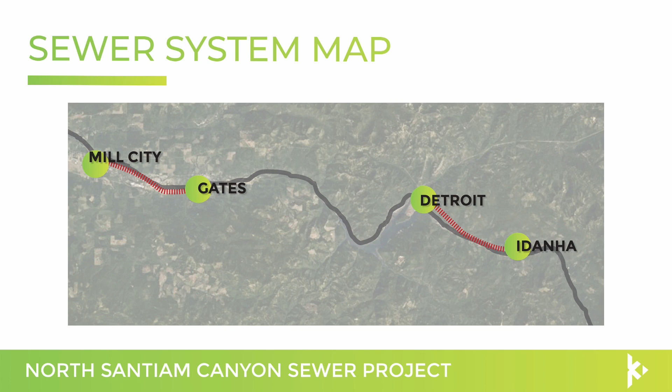This project is needed for a variety of reasons. The Mill City sewage treatment system and treatment plant currently have deficiencies in the capacity of sewage that can be treated and are at the end of their useful life. Funding is currently available to build these facilities through federal funding programs. These facilities will help support economic growth in these communities and also allow for the development of future housing, which cannot currently be accommodated by the existing treatment facilities.

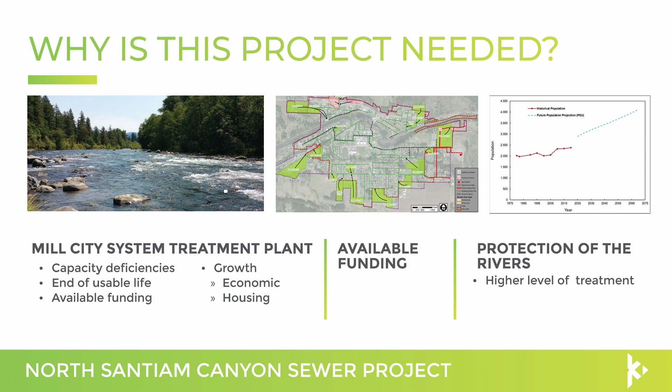The current planning efforts have been underway since 2017, and previous efforts began in 1996. This slide shows a timeline of both the previous and current efforts. The previous efforts began in 1996 with preparation of the Upper North Santiam River Canyon Sewage Treatment Feasibility Study. In 1999, the Gates Sanitary Survey was completed. In 2001, a Detroit Idanha wastewater facilities pre-design report was prepared. In 2002, the Detroit Idanha Value Engineering Study Conceptual Design Review was completed.

In 2003, a sanitary survey of on-site disposal systems for Detroit and Idanha was conducted. In 2008, the Idanha Wastewater Facilities Plan update was completed. In 2010, the Mill City Wastewater Operations and Maintenance Manual was prepared. And in 2015, the Detroit Wastewater Feasibility Study was completed. The current efforts began in 2017 with preparation of the North Santiam Canyon Regional Wastewater Analysis and Land Inventory Study. In 2020, the North Santiam Sewer Authority was formed. In 2021, the North Santiam Sewer Authority Wastewater Master Plan was prepared.

In December of 2023, the Mill City to Gates Wastewater Facilities Planning Study was submitted to DEQ. In December of 2024, all federal funds provided through the American Rescue Plan Act must be obligated. Those same funds must be spent by December 2026. In 2026 and beyond, there will be continued upper basin planning, design, and construction.

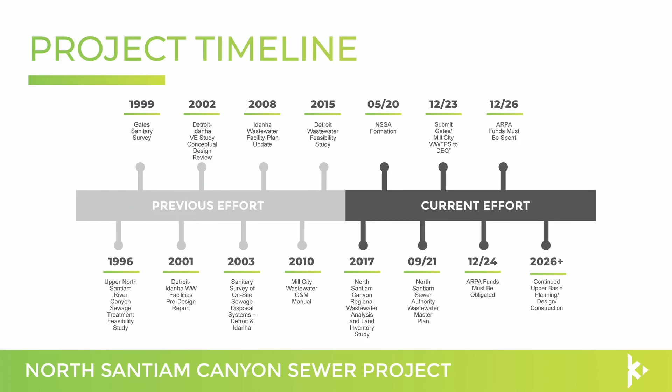Slayden has been selected as the general contractor and construction manager for this project. They are teamed with K&D Excavating. The current process began in 2023 and concludes in 2026. The flowchart on this slide depicts the schedule for that process. It shows engineering and design occurring in 2023 and 2024, with construction milestones occurring in 2023 and at the end of 2024. Pre-construction, including initial cost estimates, alternatives analysis, and review of constructability, as well as other steps, are occurring in late 2023, 2024, and early 2025.

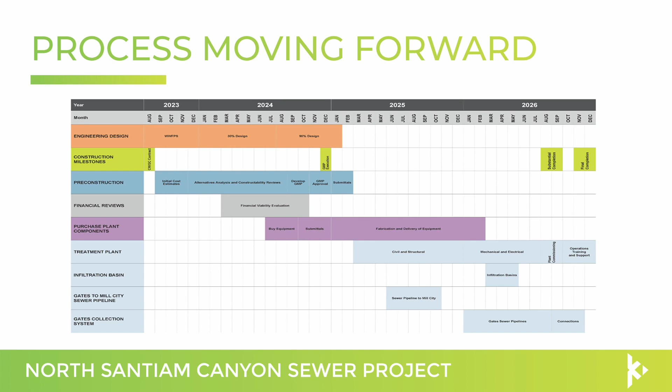A financial viability evaluation will be conducted between March and October of 2024. Plant components will be purchased between mid-2024 and the end of 2025. Treatment plant construction and design will occur during 2025 and 2026, including operations training and support in the latter part of 2026. Infiltration basin facilities are proposed to be constructed in March through June of 2026. The sewer pipeline from Gates to Mill City is scheduled for construction between June and October of 2025. Gates sewer pipelines and other connections are proposed to be constructed in 2026, starting in January and completing in November of that year.

This slide depicts the existing Mill City wastewater system. It was constructed in 1992. It has a number of issues. The collection system is characterized by small pipe diameters. The existing capacity is sufficient to treat existing homes and businesses in the area, but additional capacity for future growth is needed. In terms of treatment and disposal facilities, currently the maximum daily design flow is being exceeded on the highest flow days of the year. There would be a very high cost to address the treatment deficiencies due to the age of the plant, and it cannot be expanded under current year 2023 permitting rules.

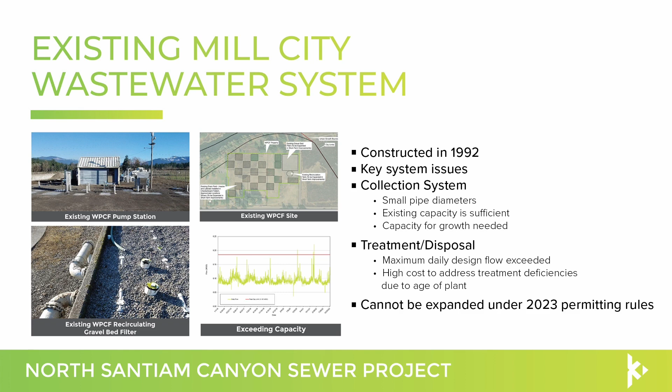This slide shows several images of the existing wastewater treatment system in Mill City, including the pump station, the recirculating gravel bed filter, the existing wastewater treatment site, and a graph that shows the number of days on which capacity has been exceeded in 2023.

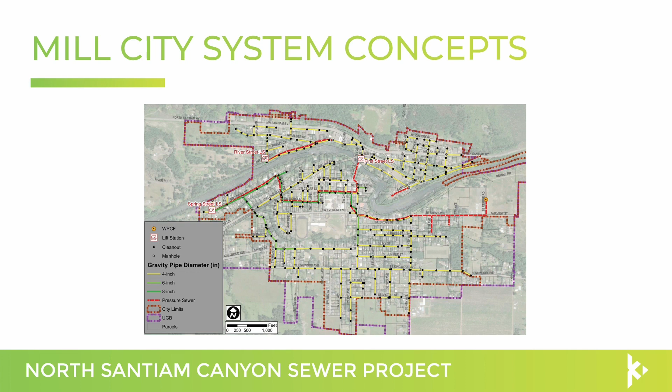This slide depicts the existing collection system in Mill City. It includes a combination of 4-inch, 6-inch, and 8-inch collection pipes, as well as pressure sewer lines, manholes, cleanouts, and a lift station.

Subsurface investigation was conducted in 2023. In phase 1, in March of 2023, pits and infiltration tests were completed at 4 sites to characterize shallow soils and how infiltration would be handled by those soils. In phase 2, in July 2023, a single monitoring well was constructed to conduct aquifer testing to characterize deep soils in 3 of the sites and how infiltration would occur in those soils.

In phase 3, in August and September of 2023, based on the results of phase 1 and 2 investigations, 2 additional monitoring wells were constructed and 2 temporary borings advanced at the most favorable site. The team then conducted aquifer testing and evaluated how infiltration would flow through the soils at that site. This slide depicts several photos and a diagram showing those activities and the results of the modeling work.

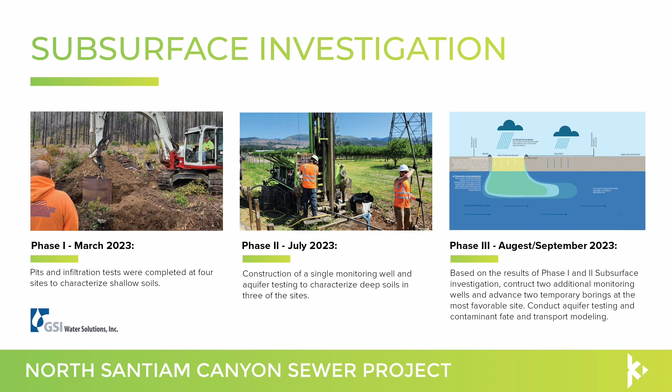2 different approaches are proposed for the collection systems in Mill City and Gates. In Mill City, existing collection system connections, including tanks for effluent, would be retained for existing homes and businesses. However, the treatment plant would allow for future users to directly connect to the new sewer system without tanks or pumps. In the community of Gates, existing septic tanks and drain fields would be removed or abandoned per state requirements.

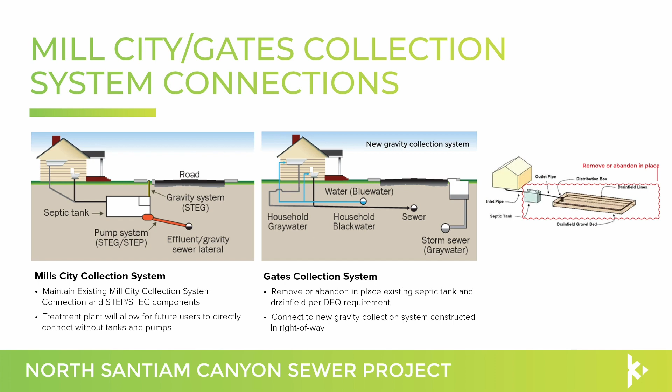Those homes and businesses would connect to the new gravity collection system, which would be constructed within the rights-of-way of roads in the area. On this slide, those different approaches are depicted with diagrams showing connections as well as existing and new facilities.

A concept for the new treatment and disposal facility has been developed. This slide depicts a diagram showing how that system would look. It indicates a series of infiltration basins as well as other buildings and facilities that would be provided at the location of the facility. The total developed acres equal about 6.25 acres, with the total site being just under 9 acres.

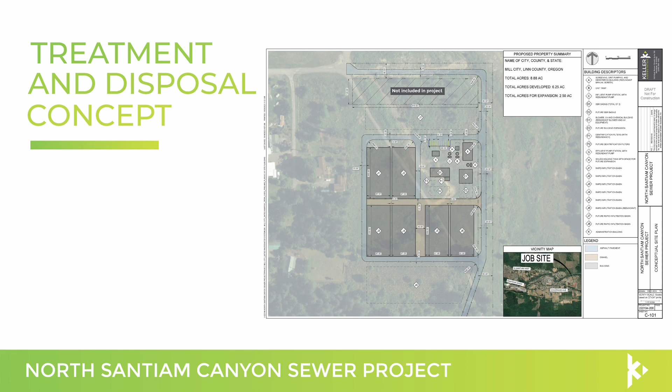Rapid infiltration basins would be used during the final step of the treatment process. These basins would be used to place highly treated and disinfected effluent into the ground. This slide depicts examples of these types of systems in the state of Florida, in Camp Rilea, Oregon, and in the state of Minnesota.

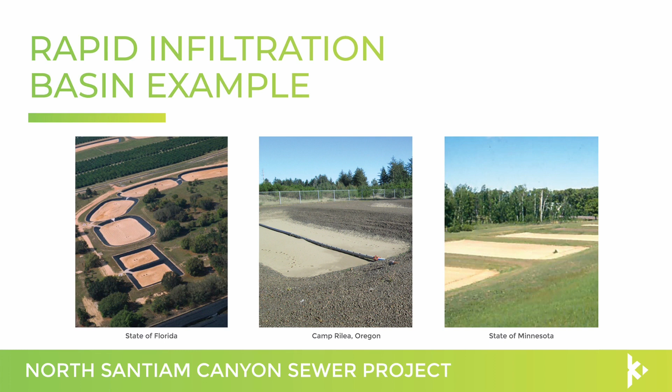The treatment process includes a variety of steps. This slide shows a diagram which illustrates those steps. First, the influent flows into a headworks facility where large particles are screened out and transported offsite. The effluent next flows through another facility where grit is screened out and also transported offsite. Next, the effluent flows into a set of equalization tanks, also called sequence batch reactor tanks.

2 things take place here. First, through a settling process, a sludge is removed from these tanks, sent to a dewatering tank, and then transported offsite. Second, equalization occurs as the secondary effluent is transported into the tertiary treatment facility, also called a denitrification filter.

The effluent is then sent through an ultraviolet disinfection facility before being discharged to the rapid infiltration basins. In this step, the highly treated and disinfected effluent is absorbed into the underlying soil beneath the rapid infiltration basins.

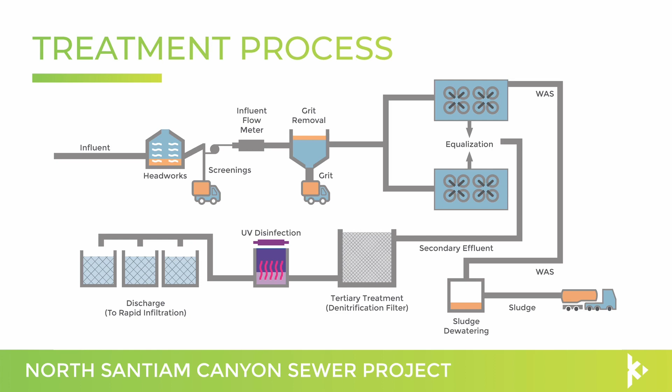The preliminary collection system in Gates includes a series of pipes constructed in the right-of-way. The map on this slide shows the general location of those pipes, which would be within the road right-of-ways. It also shows the locations of manholes and existing properties that would be served by the system, as well as the boundaries of the community.

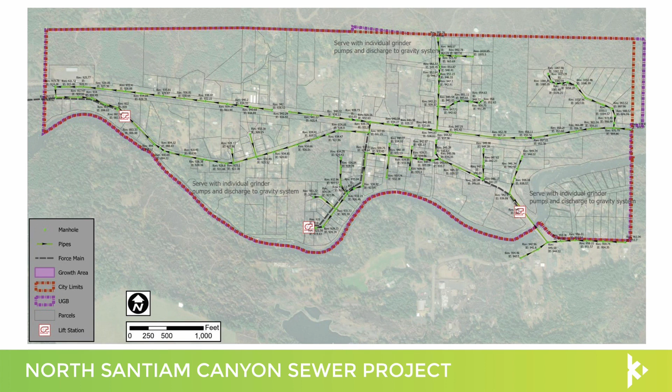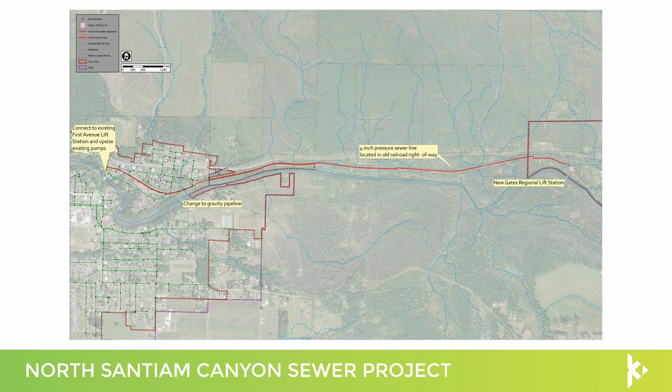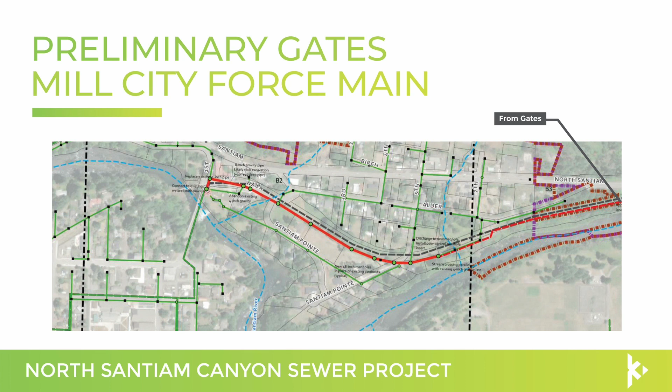A key component of the project will be construction of a new sewer line between Gates and Mill City. These slides show the location of that pipeline, also called a force main, including the different components of it. It will consist of a 4-inch pressure line, which will be located in the old right-of-way between the two communities. The pressure line will change to a gravity pipeline when it enters Mill City. It will then connect to the existing First Avenue lift station, although the existing pumps at that lift station will need to be upsized to accommodate the new flows.

A number of other preliminary improvements in Mill City have been identified. First, the existing Mill City system would be updated to increase the capacity and incorporate flows coming from Gates. A new 8-inch pressure line to the wastewater treatment facility would be constructed, and an existing 8-inch pressure line would be abandoned. The new pressure line would transport sewage into the new facility.